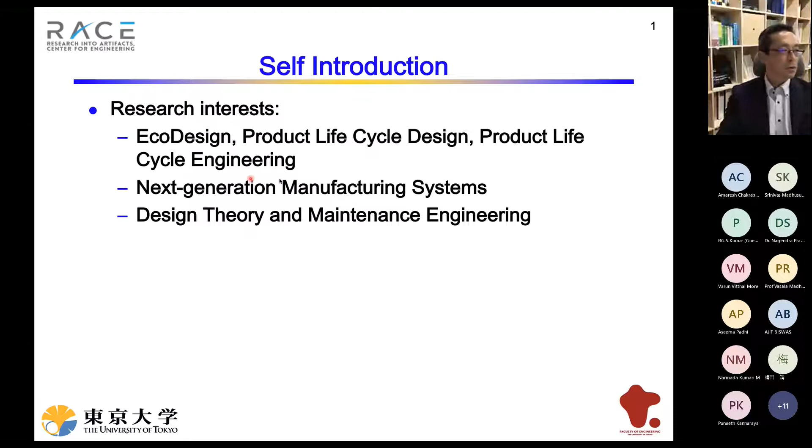Before going to the main topic, let me introduce the research center I belong to, which is called RACE, as Amaresh said, Research into Artifacts Center for Engineering. A little bit strange name, but this is the official name of our center.

And Professor? Yes? Apologies. Maybe you can switch off the video so that voice can be more clear. Okay, let me stop the video. Okay? How about it? Yeah, it's much better. The audio is much better. Oh, yeah. Thank you very much. Okay, and what did I say?

Oh, okay. As Amaresh said, the center has a collaboration relationship with Cambridge Engineering Design Center, and my center was reorganized in 2019, and the main focus is set to draw future visions of manufacturing and to develop system-oriented technologies for realizing the visions. The center consists of 3 divisions: Value Creation Division, Cognitive Mechanisms Division, and Applied Intelligence Division. I'm leading the Value Creation Division, and this presentation introduces you the overview of the research of this division.

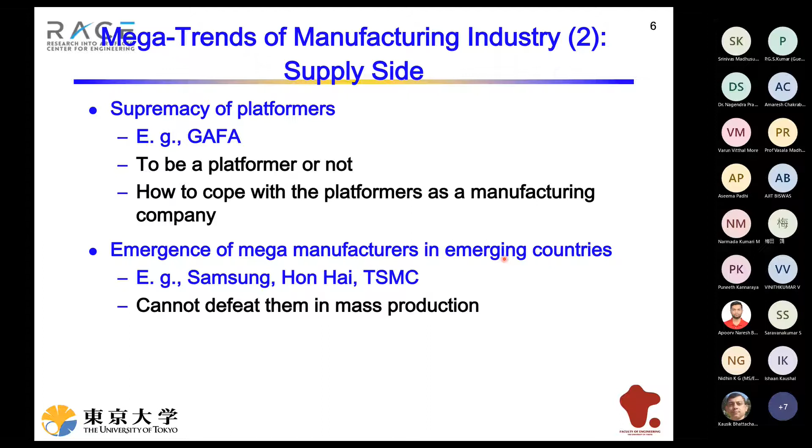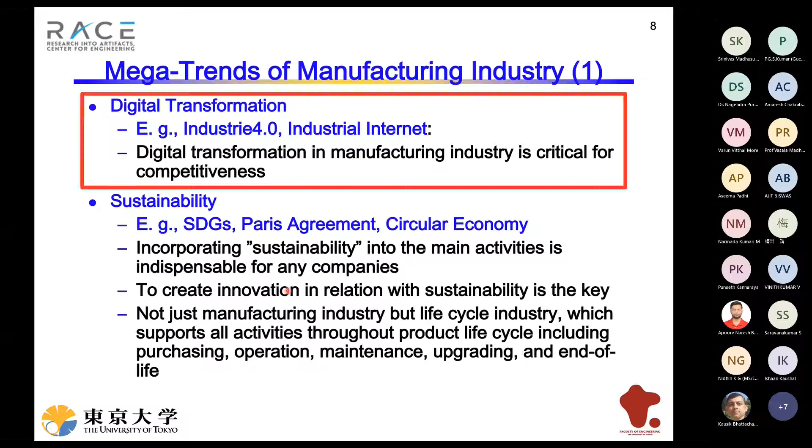And between these two areas, low altitude is emerging, where ICT and manufacturing are mixed, as exemplified by Industry 4.0. Siemens, IBM, GE are very strong in this world, but there might be some chance for Japanese manufacturers, perhaps also for Indian manufacturers, because you are very strong in software. Here is the focus of this lecture.

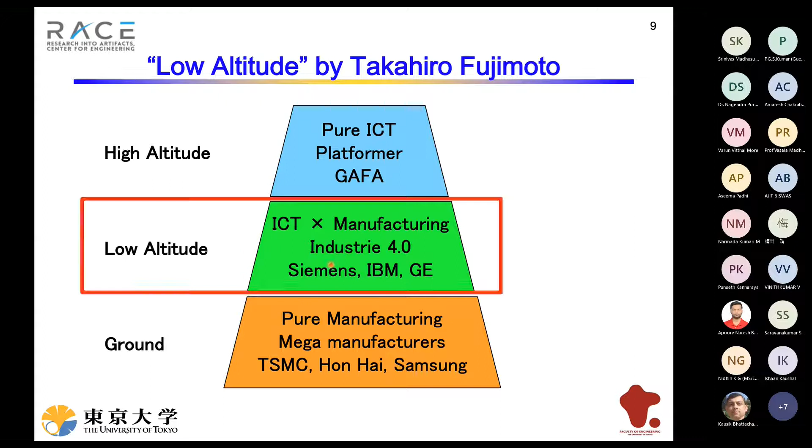This will improve productivity in a revolutionary way and enables massive mass customization. The original concept is sometimes criticized, that such automation may steal jobs of workers. But nowadays, the concept of Industry 4.0 is expanded to include human-centric and sustainability.

I think the essence is cyber-physical systems, which is a system where the cyber world and the physical world are deeply connected. Information is acquired from the physical world, processed by the cyber world, and the physical world is controlled by the cyber world.

So digital twin is also an important concept. Digital twin, my interpretation is, digital twin is a form of CPS, cyber-physical systems, and the model in the cyber world corresponds to the object in the physical world one by one.

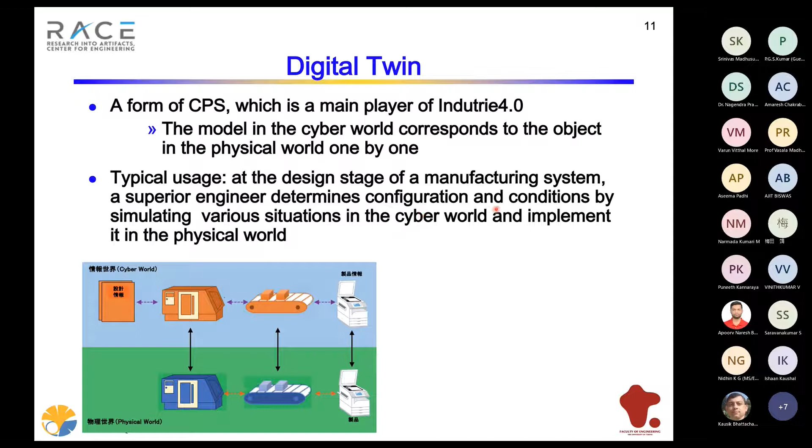So typical usage is at the design stage of a manufacturing system. A superior engineer determines conditions by simulating various situations in the cyber world, and if he or she finds out a best solution, he or she implements it in the physical world.

As I said, Siemens takes advantage in this domain. Let me show you a demonstration video by Siemens. I hope you have not seen it before.

Can you hear the sound? Yes, we can hear. Okay.

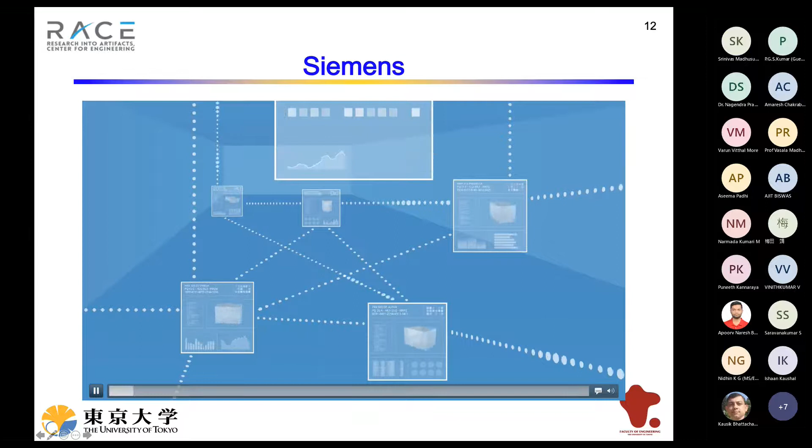They will be completely networked and control production autonomously, and in a way that is more efficient and uses fewer resources than ever before. The possibilities are so vast and groundbreaking that many experts refer to it as a fourth industrial revolution, Industry 4.0. The first steps towards Industry 4.0 have already become reality.

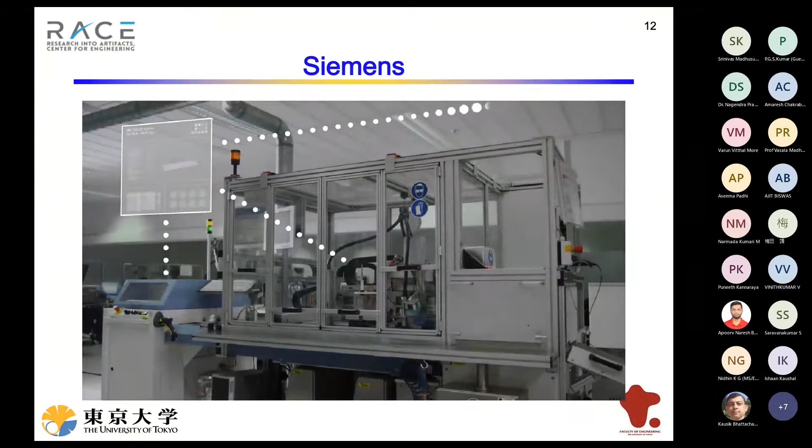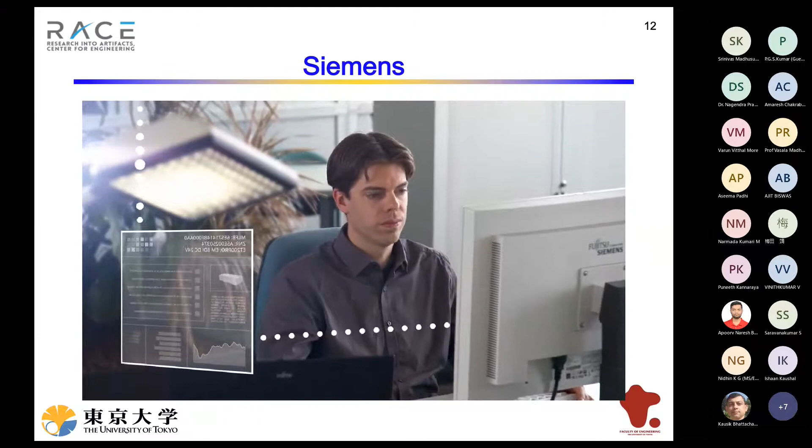It all starts when mass production components become a unique item, with their purpose predefined at the outset. Because even before manufacturing, the component exists in virtual reality, including all information required for its production. But all the other necessary components also have to be mapped into the virtual world. They also get names and addresses, and thus an identity, so that they know where and when they are needed in the production line or process.

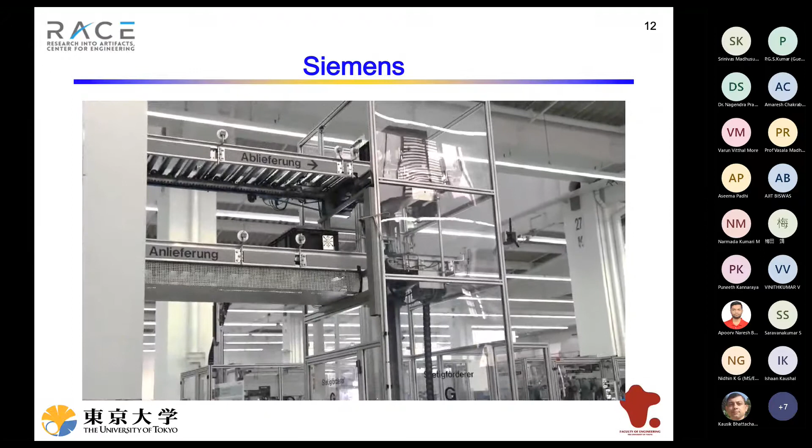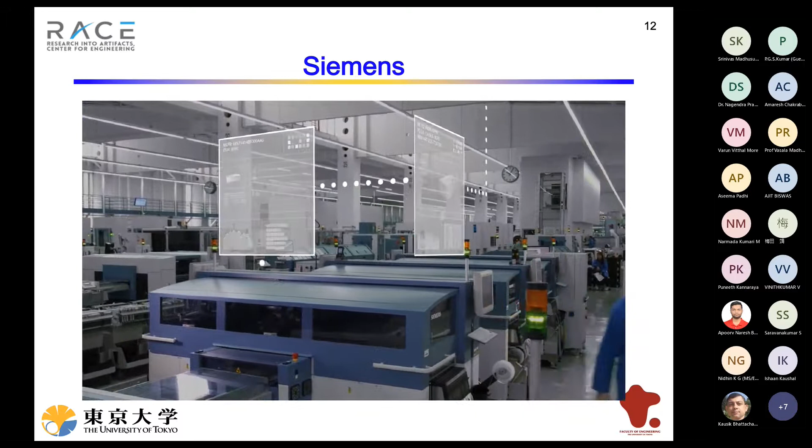Equipped in this way, they are able to negotiate their way through the digital factory for kilometers before reaching their destination. Arriving at the processing station, the workpiece is identified and the machine calls up in real time all information needed for processing. After each station, the work gets checked automatically, either optically or by using other measurements. Deviations from target specifications can thereby be discovered on the spot, and faults can be eliminated quickly.

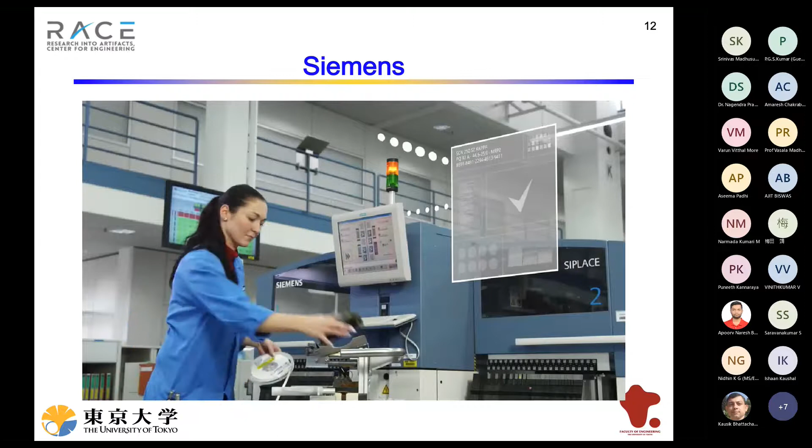If a machine needs replenishment or maintenance, it issues an appropriate request before shortages or breakdowns are experienced. The amount of resources used is immediately recorded in the system, and stocks get updated. During processing, all relevant data for the product is stored in its own digital product memory. This means that every stage of production can be traced precisely.

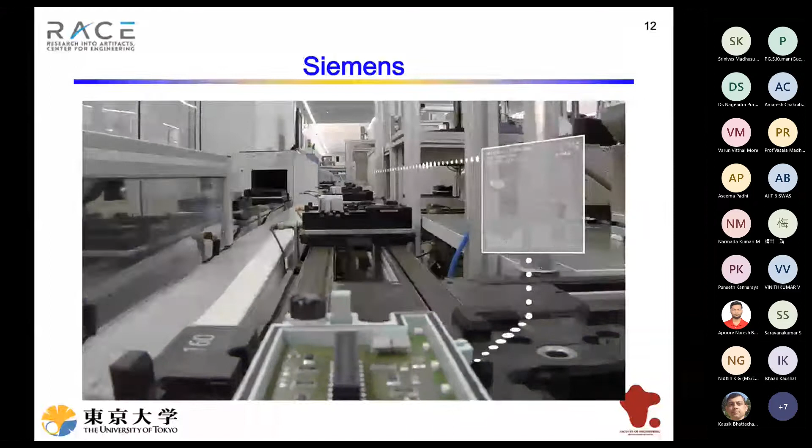In the factory of the future, machines and workpieces will even communicate directly with each other and make autonomous decisions about the next production step, comprising a system that is decentralized, efficient, and flexible. For this, so-called cyber-physical systems are the key enabling technology. But for all this technology, humans are still crucial. Even in a highly automated production environment, creativity, experience, and the ability to assess and evaluate situations remain irreplaceable.

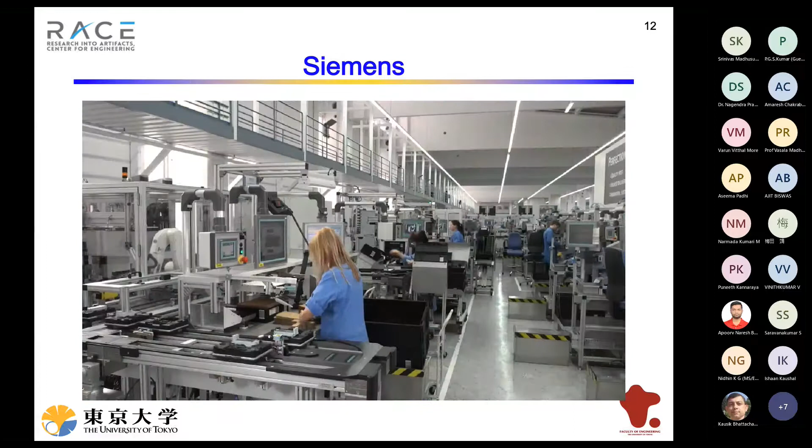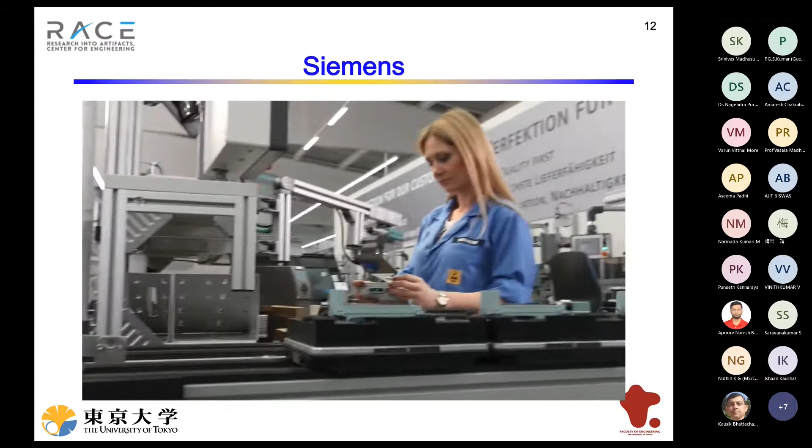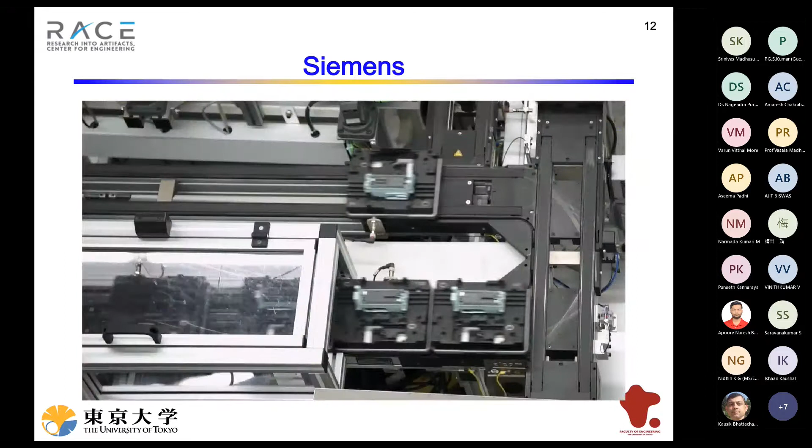But technology can provide valuable support. Operator-safe control systems already allow automatic and manual production to be combined. And regarding quality control, employees use augmented reality to determine whether the product meets the required quality standard and can be shipped to the customer. Electronics and software allow for ever higher levels of networking to be reached. Completely new, complex systems are being developed in next to no time. The German electronics industry is at the heart of this rapid change with its own innovative products.

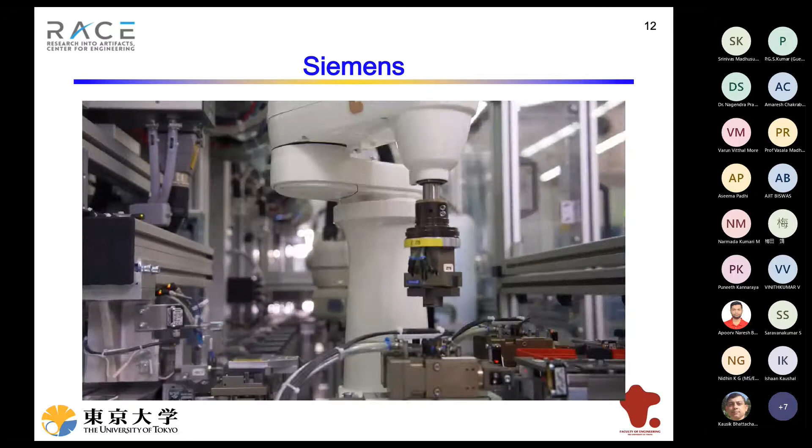Some important questions need to be resolved before factories become truly smart, including topics such as standardization and IT security. Yet the opportunities provided by Industry 4.0 are enormous. Productivity can be increased by up to 30%, and both the quality and diversity of products will significantly rise. At the same time, the period between development and production will shorten. Thus, Industry 4.0 will make a decisive contribution towards maintaining and improving Germany's competitiveness as an industrial location center.

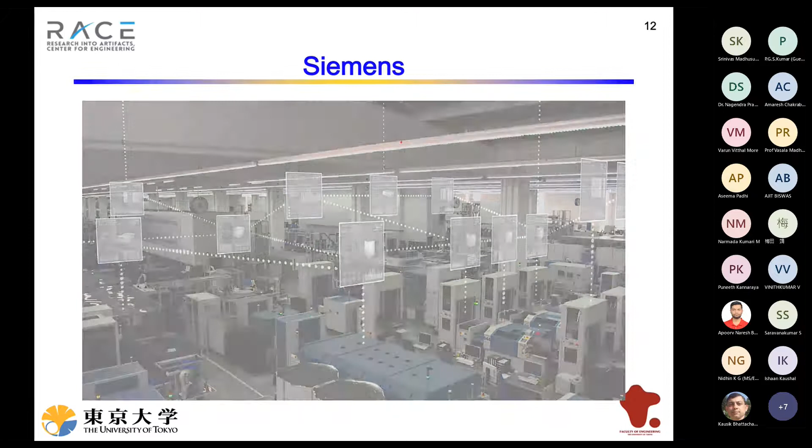Okay, this is a typical image. You may have known the image of an Industry 4.0 based factory.

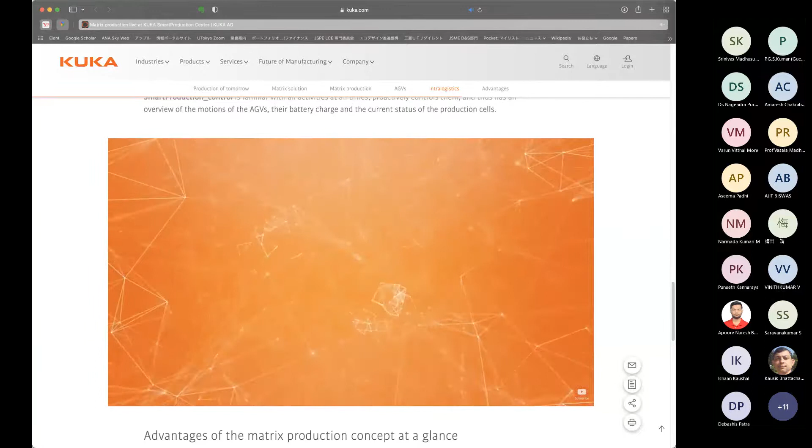Okay. Let me go back, sorry. Just a moment. I cannot go back. Go back. Yes, you're back. Can you see? What can you see? Just a moment. Sorry, it's very difficult to operate. Okay, I think I'm now fine.

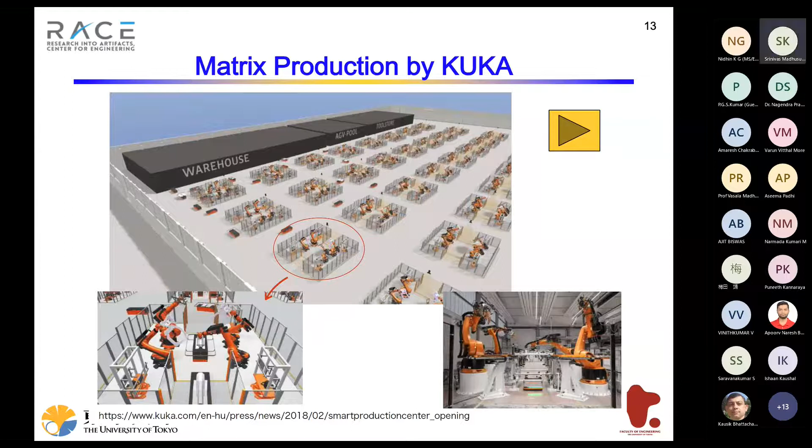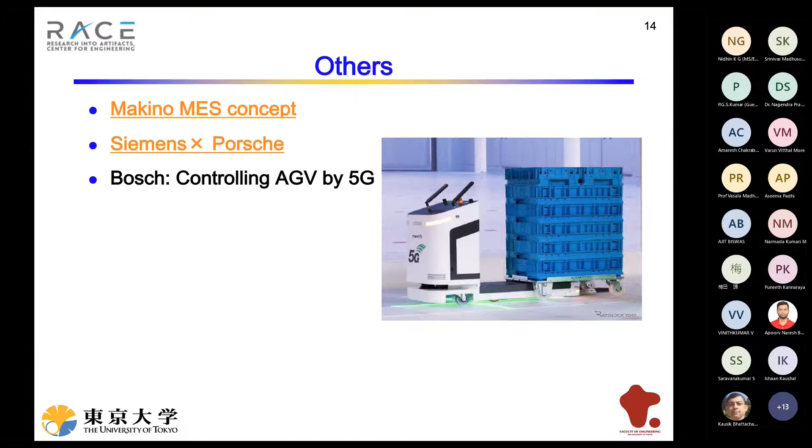Matrix production by KUKA. And there are several demonstration videos on the internet using a very cellular flexible manufacturing system of AGVs with 5G telecommunication. So, this is a very rough summary of megatrends.

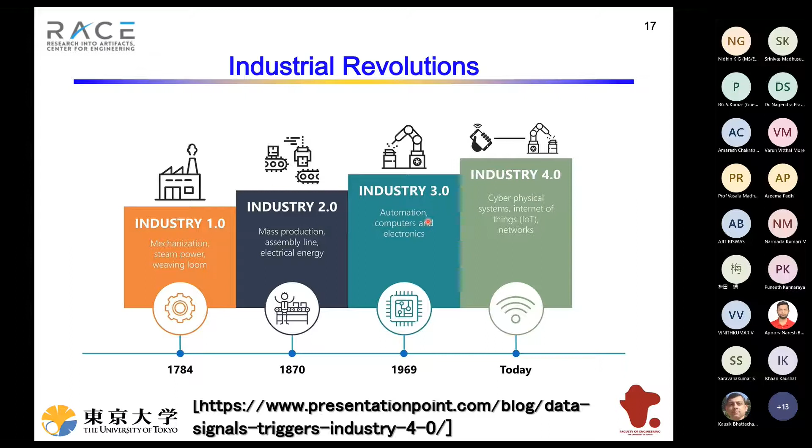You may have known the four steps of industrial revolutions. The first step is the steam engine. The second is mass production. The third is automation, including CAD, CNC, and industrial robots. And the fourth is now. Japan was strong in the era of Industry 3.0. So let me discuss features and issues of the Japanese manufacturing industry, mainly issues in the megatrends we discussed.

First, about digital transformation. The Japanese manufacturing industry failed to propose a new manufacturing paradigm from the 1980s until now, because Japanese manufacturers are advanced in Industry 3.0. In a factory, machines are automated and everything is digitalized, but not connected to the outside. Especially, each company automated in their own way without employing standards, platforms, or standardized tools like Siemens. And very thick barriers between companies hinder being connected.

Second, about sustainability, the attitude is very passive and just follows legislation. This is not adequate nowadays, and they have very weak motivation to create innovation in relation to sustainability. About the supremacy of platformers, I cannot imagine world platformers like GAFA coming out from Japan. Is being a parts supplier to the platformers a good position? I don't think this position is sustainable.

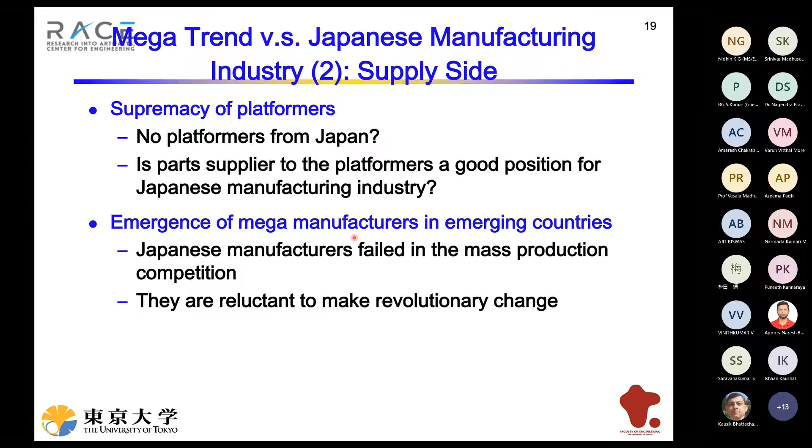Emergence of mega manufacturers in emerging countries: Japanese manufacturers were very strong in the 1980s and failed in the mass production competition around 2000. But still, they are reluctant to make revolutionary change. That's a problem. Change of people's sense of value: Japanese manufacturers persist in producing high-quality hardware and are not good at planning service business.

Finally, the Asian market. Let's assume that people in this market want cheap products with moderate quality. Japanese manufacturers are not good at making such products. When we visit Southeast Asia, it is often said that Japanese products are reliable but not attractive. This is the position of Japanese manufacturers in Asia.

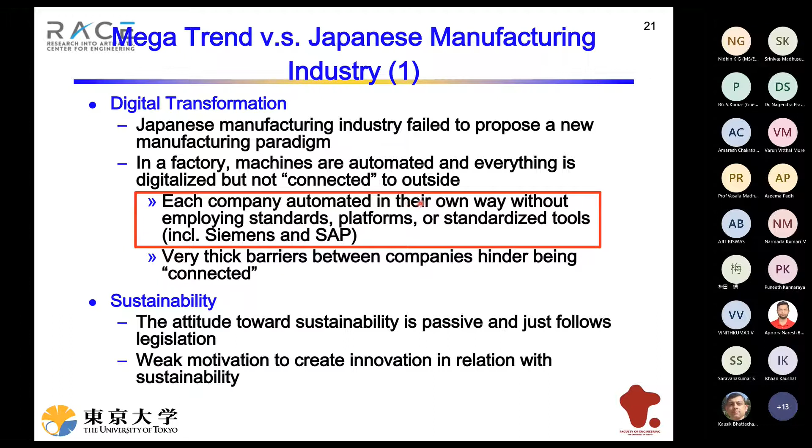So let's go back to the issue of digital transformation. A typical behavior of Japanese manufacturing is here: they go on in their own way, without employing standards. On the other hand, Germany considers standardization very important. For example, this figure indicates RAMI 4.0, the Reference Architecture Model Industry 4.0.

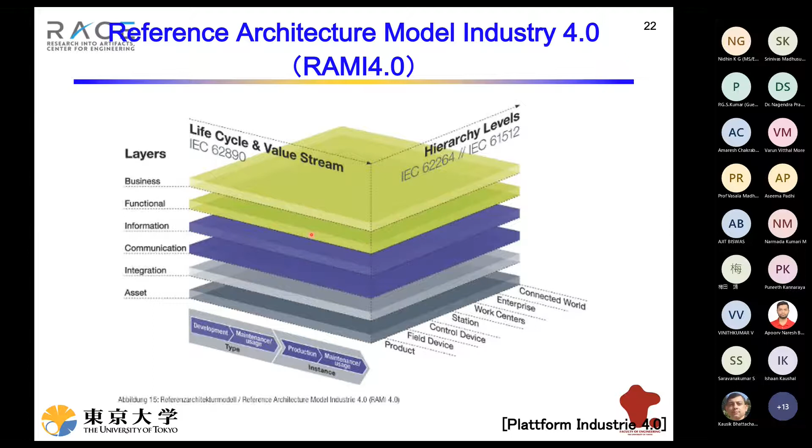Why is standardization so important? We can interpret that Industry 4.0 tries to transfer manufacturing systems from know-how based, which Japanese manufacturers are good at, to modular and standardized ones. Industry 4.0 aims at high-level automation for cost reduction in the first sense, but digital transformation and networking is for flexibility and mass customization.

In other words, the concept of the manufacturing system is based on digital, modular, and architecture, which requires top-down thinking. And I think this is almost the correct approach to next generation manufacturing systems. But Japanese manufacturers are not good at these three items. That's a problem.

My personal observation on the Japanese manufacturing industry is as follows. They have too large a legacy to act quickly and prefer the status quo to jumping into digital manufacturing. For example, they hesitate to invest in transforming to digitalized manufacturing and keep trying to make high quality hardware products because they cannot escape from the past successful experience in the 1980s, namely mass production of high quality products with low costs.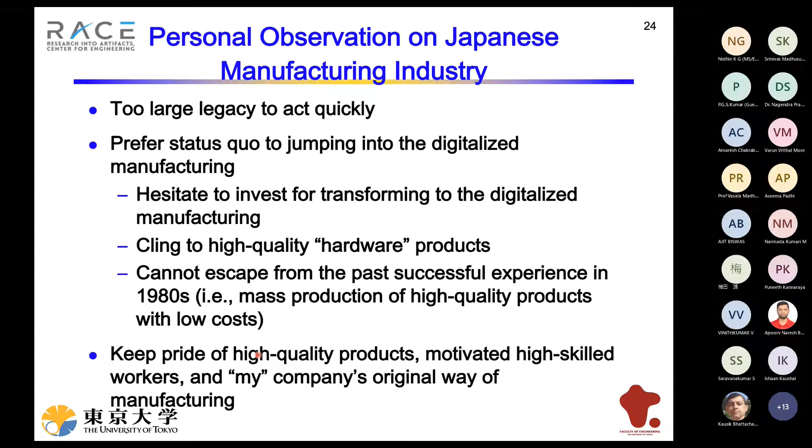Where was I? Okay. So on the other hand, they keep pride in producing high quality products, they have very highly motivated, highly skilled workers, and they have a very strong mind of their company's original way of manufacturing. So let me show you a typical example of digitalization in Japanese manufacturers very quickly.

A typical pattern of SME manufacturers is like this. They added IoT capability to machine tools since the government gives some subsidy, and they can collect a lot of log data from machine tools. But they do not know how to utilize the data for creating value. That's a problem. Machine tool manufacturers provide, for example, preventive maintenance service, but SMEs hesitate to provide their operation data to the manufacturers.

On the other hand, of course, some manufacturers try to win an advantage in this area, including FANUC FIELD system and Mitsubishi Electric Edgecross. They want to be platformers in digital manufacturing. But these two frameworks are just platforms of IoT connection, not supporting contents, so to speak.

Let me click. Sorry, it is very troublesome, but let me show. This is a FIELD system video, a very short one.

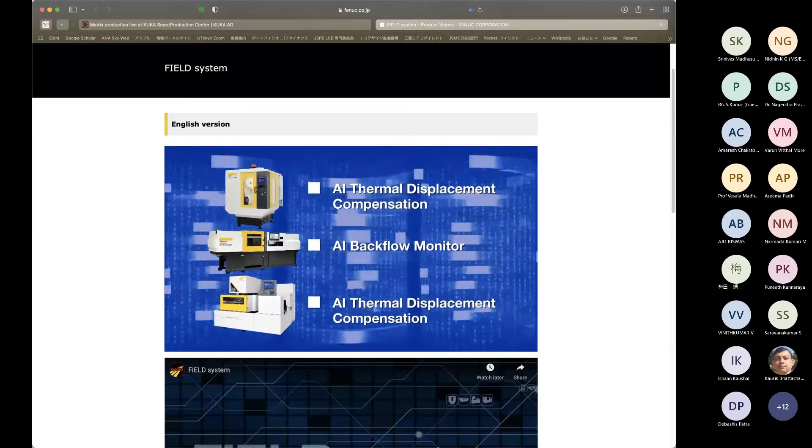FIELD system is an edge-heavy open platform which connects, monitors, thinks, and drives all machines and devices on the factory floor. It connects machines and devices at the edge, regardless of the manufacturer or generation. Through networks which work with LINKi or through a vast range of applications, it monitors and performs preventive maintenance. FANUC's AI uses FIELD system or the LINKi series to gather and analyze data suitable for artificial intelligence. The intelligent usage of machines leads to a smart factory which is highly efficient and optimized.

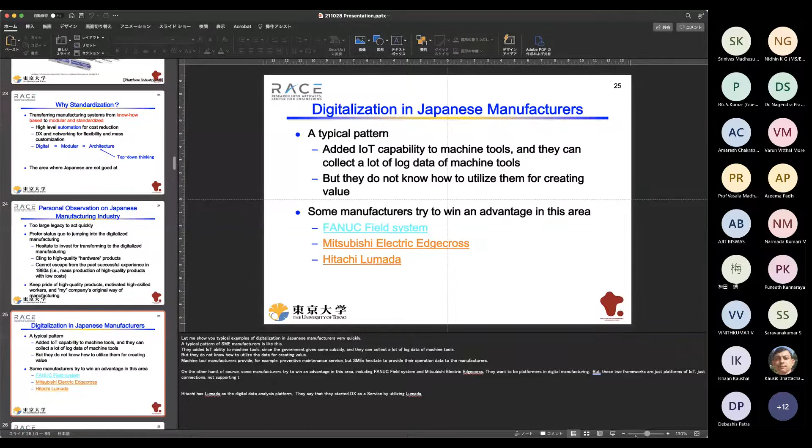Something like this. Let me see what happens. Sorry. Going back. This one. And what happens? Very

complicated procedure. Okay. And I hope you know the company name Hitachi. Hitachi has Lumada. It's a digital data analysis platform, and they say they started DX as a service, digital transformation as a service, as a new service by utilizing Lumada. Lumada is a very big data analytics platform. Okay.

So I can point out two problems from my standpoint. First, the Industry 4.0 type digital transformation in manufacturing might not fit the strengths of the Japanese manufacturing industry. The question is, what are the strengths of the Japanese manufacturing industry? I asked young manufacturing engineers, who are the hope of the future, in a famous Japanese manufacturer.

There are a bunch of answers, but some typical answers include: keep promises, even if they are verbal promises, not written, or collaboration among different sections. Well, this one is, I think, interesting: read what is not written in the drawings and complement their defects, assuming what is not written. Or even if the design is not good, the manufacturing section produces products by complementing it during the startup production stage. I don't know if this is a good thing or not.

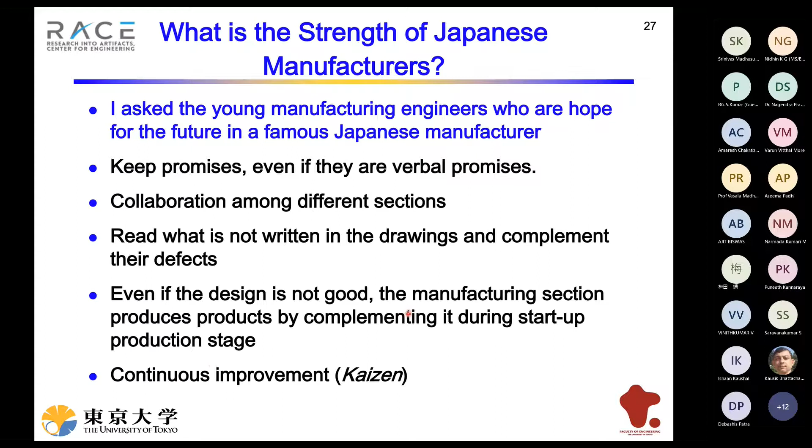And continuous improvement named Kaizen. So perhaps the strength is continuous pursuing of high quality in manufacturing, which results in high quality products and continuous improvement in production. This is the first problem.

And the second problem is many engineers and technicians cannot follow the digital transformation. However, in the digitalized manufacturing systems, they should execute engineering activities, including planning, design, development, construction, operation, maintenance, Kaizen, continuous improvement, and replacement of manufacturing systems by utilizing the cyber world in addition to the physical world. But they are not prepared.

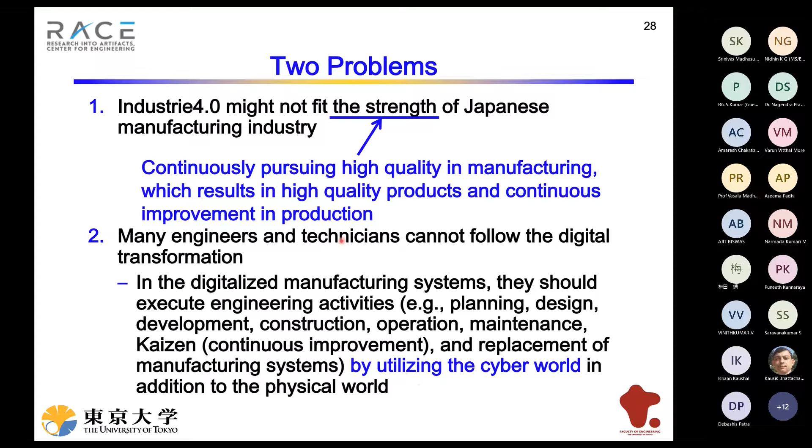Perhaps we need new manufacturing strategies after mass production of high quality products. So for the first topic, we should transplant the strengths of the Japanese manufacturing industry to the new vessel, I mean digital transformation. So very human-oriented.

And for issue 2, we need a new education curriculum for manufacturing system engineers. The current curriculum for manufacturing engineers in Japanese universities, for example in my university, is very old-fashioned. We need not only manufacturing science and technologies, but also IoT, CPS, and AI, and we need some system thinking.

In this presentation, I cannot touch upon the second issue because of limited time. The focus of this presentation is manufacturing system engineers, whose role model is as follows.

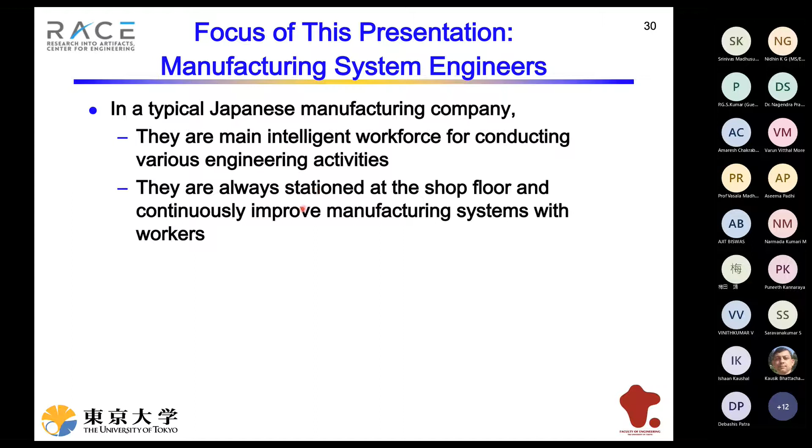In a typical Japanese manufacturing company, they are the main intelligent workforce for conducting various engineering activities, including design of manufacturing systems, or operation and maintenance of manufacturing systems. And they are always stationed at the shop floor and continuously improve the manufacturing systems with workers.

So next, let us move on to the third part, digital triplet.

Do you have any questions or comments on the second part? Is it fine for you? Yeah, I think so far so good. Looks fine. Okay, so let's move on.

So, digital triplet: we are proposing the concept of digital triplet as a form of cyber physical production system. We observe that Industry 4.0 takes a rather top-down approach, assuming CPPS, or cyber physical production system, does not change frequently since they have enough margins and robustness.

It aims at automation as much as possible, and perhaps it is not assumed that CPPS is modified by workers at the manufacturing site. But as we discussed in the previous slide, the strengths of Japanese manufacturers include field experts' diligence, knowledge, and skills, everyday Kaizen. As a result, the production lines are kept improved under the lean concept.

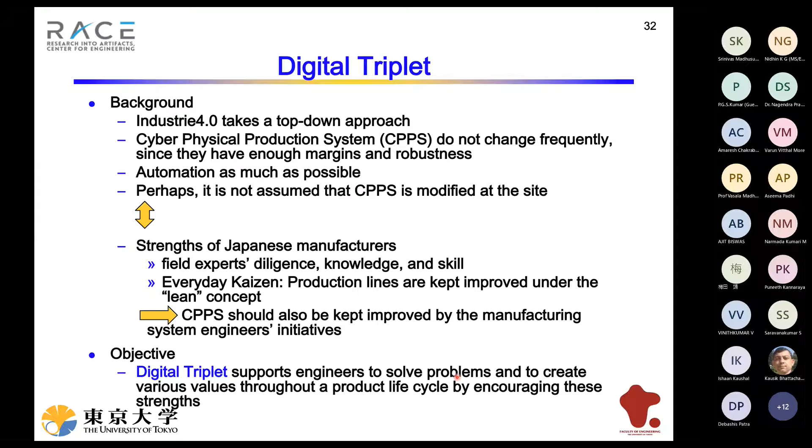Digital triplet integrates these three worlds to realize integrated support of engineering activities throughout the product life cycle, including design, manufacturing, use, maintenance, and so on, and circulation of resources, very important.

Let me illustrate an engineering activity on digital triplet. From now on, engineers should execute engineering activities mainly with the cyber world in addition to the physical world. In such a case, an engineer executes...

an engineering activity, and the activity consists of data collection, information analysis using AI tools, some simulators or CAEs, other tools, and evaluate the result and make a decision. And if needed, execute a plan. We call this cycle the engineering cycle. When an engineer executes this cycle, the cycle creates some value from the data.

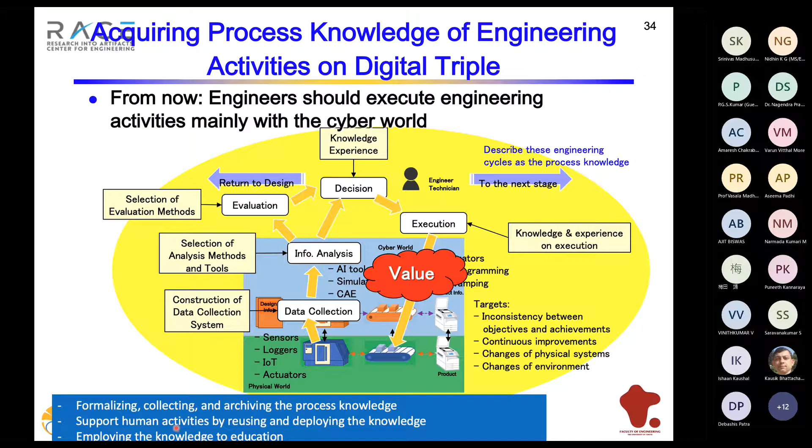We'd like to describe these engineering cycles as process knowledge. In other words, we'd like to formalize, or collect and archive, the process knowledge, support human activities by reusing and deploying the process knowledge, and employ the knowledge for education by generalizing the knowledge. That's what we want to do. In other words, the engineering support we assume is as shown here.

We'd like to represent an engineering cycle as a combination of digital twin and process knowledge on digital triplet. This is possible by recording engineering cycles in the cyber world, including collecting data, which data they collect, which data they focus on, and which tools they used in analyzing data. So the history is represented as a log in the cyber world. This is the basic fundamental concept of digital triplet.

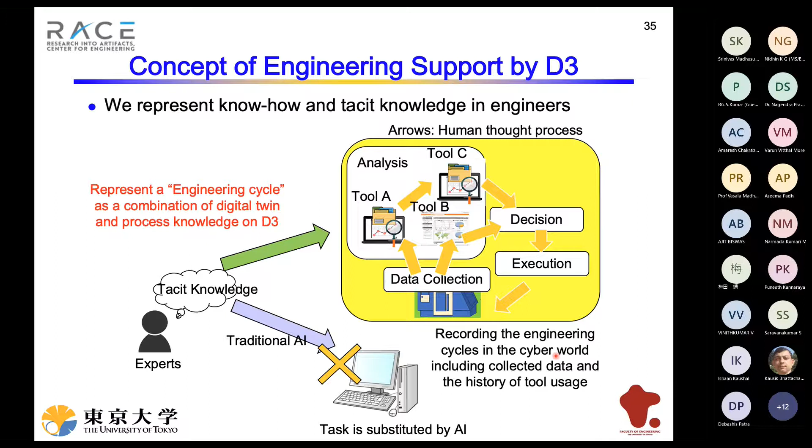Let me describe the image of digital triplet with an example. This is the example of machining molds for injection molding of plastics. This is a real example, and this company is famous for making high-quality molds. They machine the molds by machining centers, and various know-how are needed in generating NC programs to operate the machining center and selecting cutting conditions and tools.

First, on the digital triplet system, we recorded how skilled workers determine the NC program and cutting conditions. We developed a digital twin system of the machining center, and a team of skilled workers makes NC programs and machines a mold with the NC program and certain cutting conditions, and they evaluate the quality of the machined mold and modify NC programs and cutting conditions. They repeat this cycle until they get the mold with enough quality.

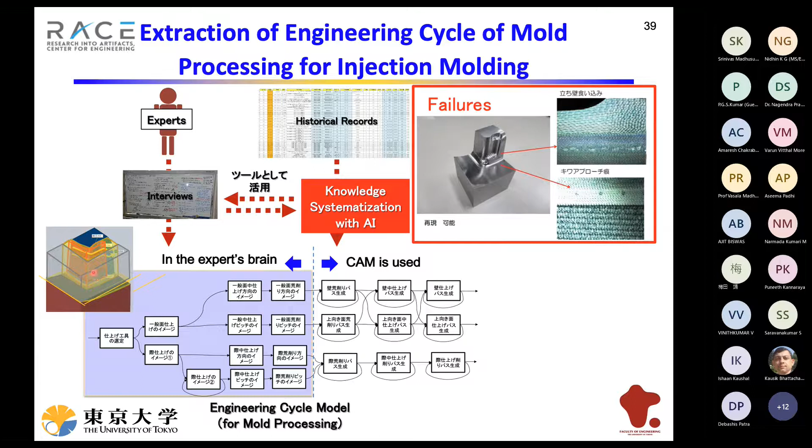This illustrates a part of process description in the problem-solving layer for selection of a finishing tool. First, the expert estimates required length and R, the radius of the tool. If the radius is larger than 0.1 millimeter, they try to select a tool from standard tools the company prepares beforehand. Here, the guiding principle is shorter length and larger R is preferable.

If the expert cannot find the tool, they search for special tools which are not used regularly in the company. The guideline here is also that shorter length and larger radius is preferable, and deformation should be smaller than 15 micrometers. If they find the tool, this action of selecting the finishing tool is terminated. If they cannot find the tool, they should use EDM, electric discharge machine, instead of normal machining.

Anyway, the top expert in this company recognized that this engineering cycle model is useful. In this way, we extracted an engineering cycle as a process description.

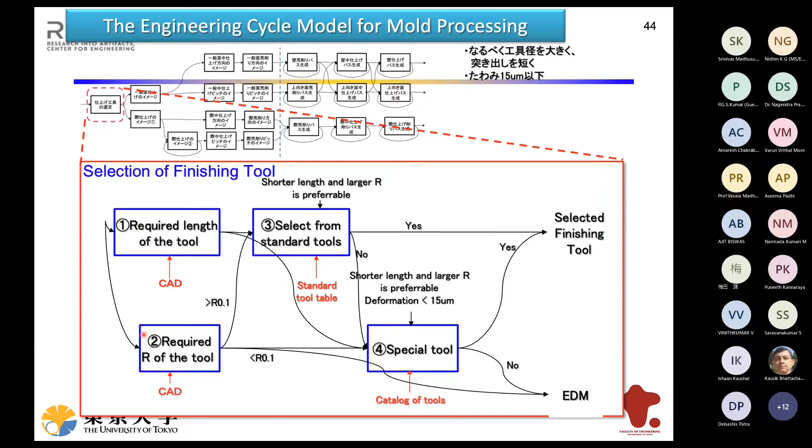In this way, the engineering cycle model becomes smarter, digitalized.

This is the result with the engineering cycle model. The cutting direction is correct, appropriate tools are selected, and there are smaller loads on the tools by dividing the processes. It has 9 steps. The order of processing is not good around here, but this can be modified. So by using the engineering cycle model, the novice understands the flow of the processes and the way of thinking to select the conditions of each process.

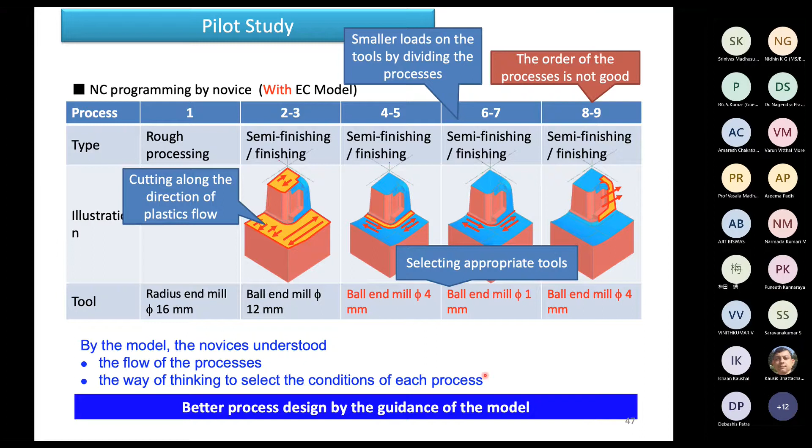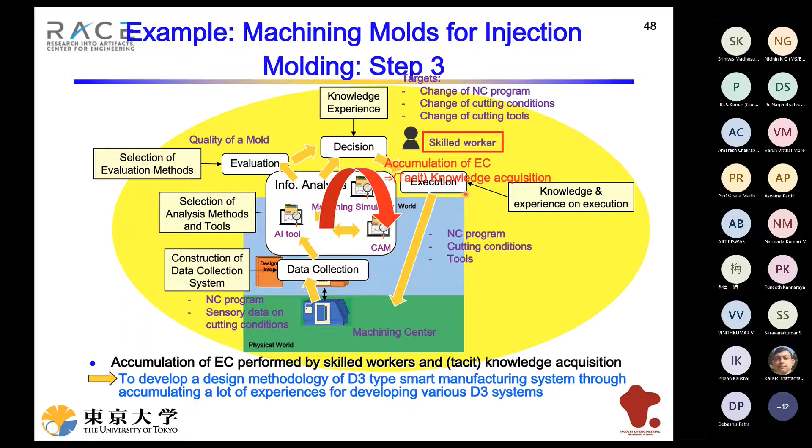This is our achievement. What we'd like to do with digital triplet: by accumulating engineering cycles on the digital triplet system, we hope we can extract tacit knowledge, and by using such extracted knowledge, skilled workers can try to develop new skills. By repeating these cycles and repeating development of various digital triplet systems, we as researchers can arrive at some design methodologies of digital triplet smart manufacturing systems. This is our goal.

Okay, if you don't have any questions, let's move on to the final part. Okay, sorry, I skipped this slide.

There are some research efforts on human-centered cyber-physical systems. Digital triplet is a combination of human engineers and cyber-physical production systems. Digital triplet does not aim to automate manufacturing, but rather to support human engineers. We dare to decompose the cyberspace of CPPS into two worlds: digital twin, which models the physical world, and the intelligent activity world, where humans solve various problems by using the digital twin.

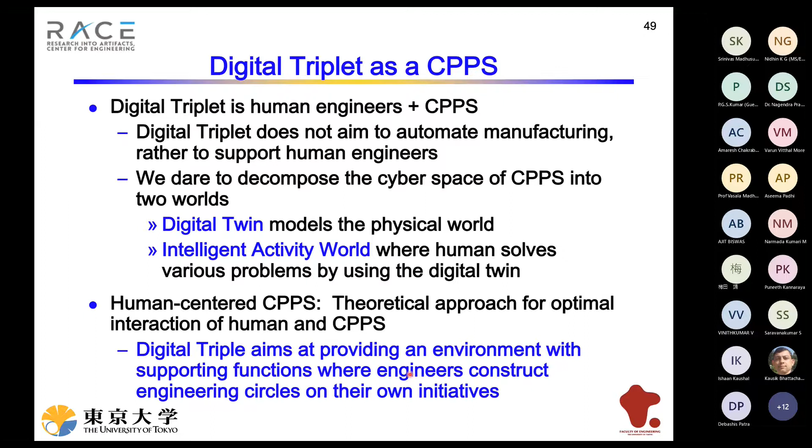There are some research efforts on human-centered CPPS. In these efforts, I dare to say that human mainly means the workers, but the target of digital triplet is intelligent engineers. Digital triplet aims at providing an environment with supporting functions where engineers construct engineering cycles on their own initiative. This is the new, digital type of continuous improvement, so to speak.

Okay, do you have any questions or comments? Okay, fine. So then let's move on to the final part, learning factories.

You may have already known this, but this is the concept of learning factory. It's a trend, I think, especially in Germany, to construct factories in universities for the purpose of education and research. If we have a factory in a university, it is very easy to teach manufacturing systems.

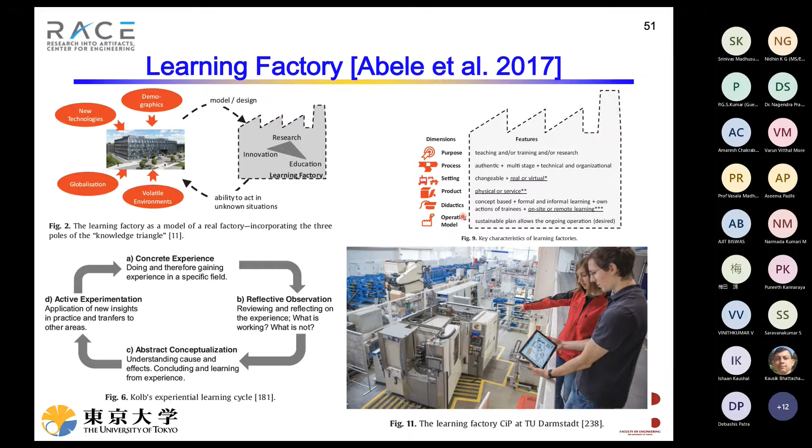Active experimentation and concrete experience reflect observation and abstract conceptualization, so we can run this kind of cycle on manufacturing systems. According to the concept of learning factory, we have constructed a much smaller factory than this very big one. It's at the TU Darmstadt.

This is the overview of our learning factory named Digital Triplet Type Learning Factory at Race, or D3LF at Race.

The learning factory we developed is used for education and research from the viewpoint of manufacturing systems. Rather than machine tool or processing, it covers related engineering activities, including design, operation, maintenance, or continuous improvement of manufacturing systems, including lectures and practice for undergraduates and graduates.

For education, we believe digital triplet, especially recording engineering processes, is very effective because it can record the processes of executing tasks by students. By watching the model, students can review what they did and how they did it. By comparing their record with expert processes, they can learn a lot about where it is good and where it is not good. We also do research, for example, developing a method to support engineers in executing continuous improvement by using digital twin. Utilizing digital twin, and of course digital triplet, is the key.

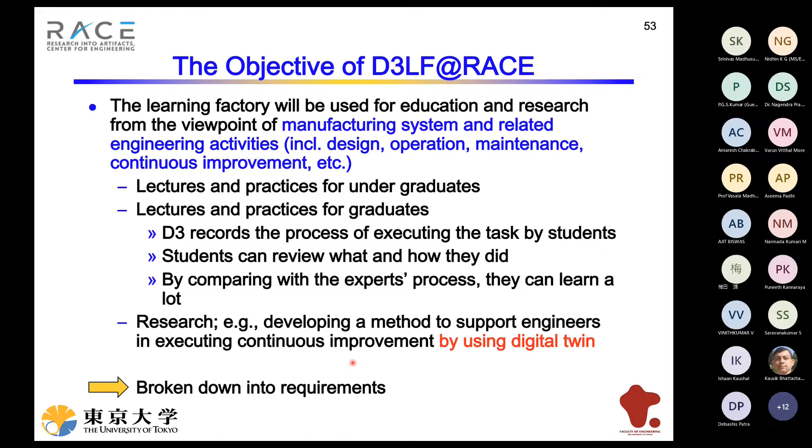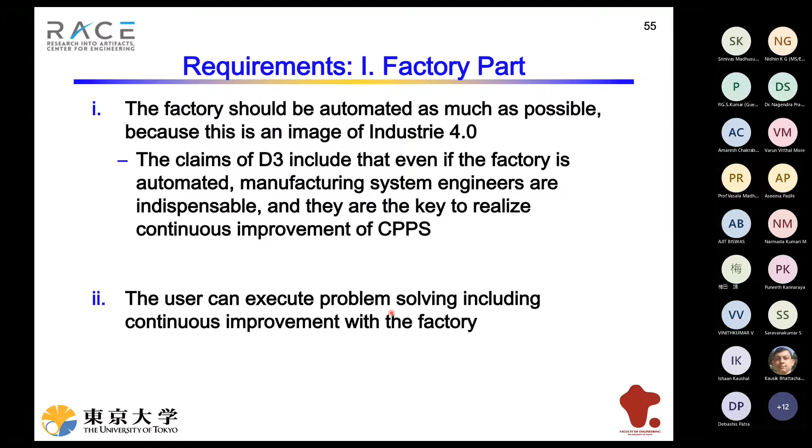The factory should be automated as much as possible because we think this is an image of Industrie 4.0. The claim of digital triplet includes that even if the factory is automated, manufacturing system engineers are indispensable, and they are the key to realize continuous improvement of CPPS. The second specification is that the user can execute problem solving, including continuous improvement with the factory. For realizing the first requirement, we constructed an automated assembly line of Lego cars as shown here.

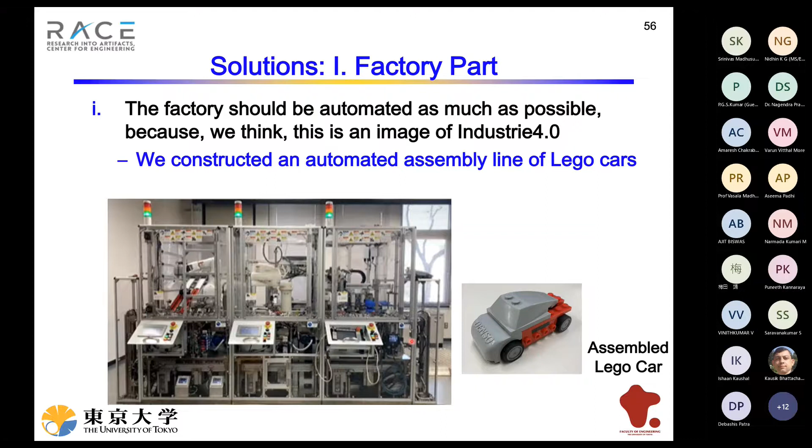I will show you the video. The video shows the assembly process of Lego cars, but the speed of the video is 2 times faster than the real one. Let me see. Okay. Oh, sorry. This has no sound. It's okay.

First, the tire is put, and second, the body is assembled with the robot. On the third stage, the roof is assembled and the quality is checked with the slope behind the robot. You can see, yes, this is the slope, and it confirms the car is running, and if the product is normal, the robot puts the car in this box. This is a very rough process.

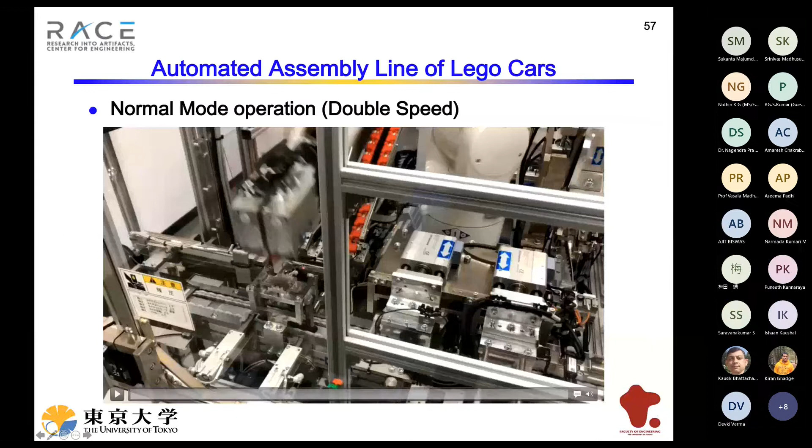Oh, I made a mistake. Sorry. How can I do that? Okay. Sorry. Just a moment. Please be patient. Let's do it again. Okay, I'll come back. Sorry.

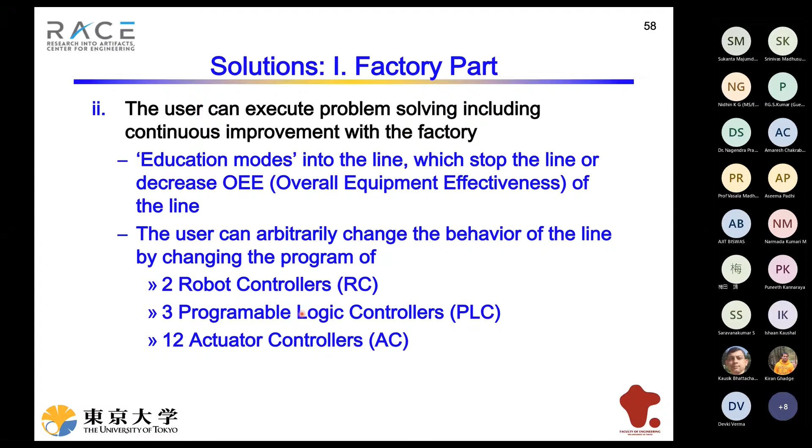And for the second requirement, we installed education mode into the line, which stops the line or decreases the OEE of the line. Also, we designed the line so that the user can arbitrarily change the behavior of the line by changing the programs of controllers installed in the line. Actually, the line has 2 robot controllers, 3 programmable logic controllers or PLC, and 12 actuator controllers.

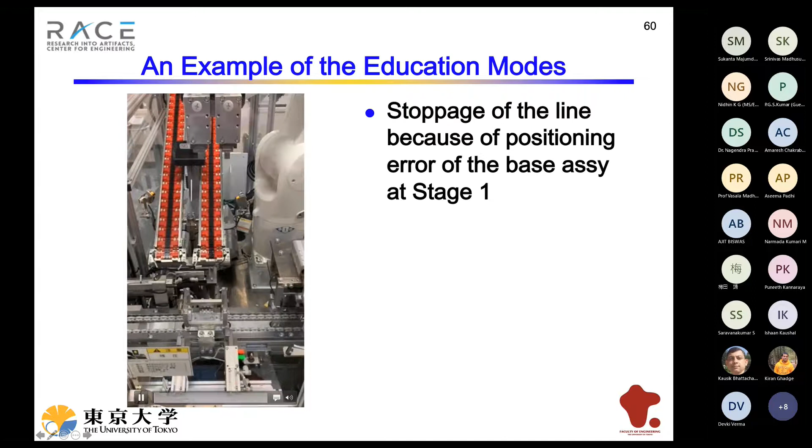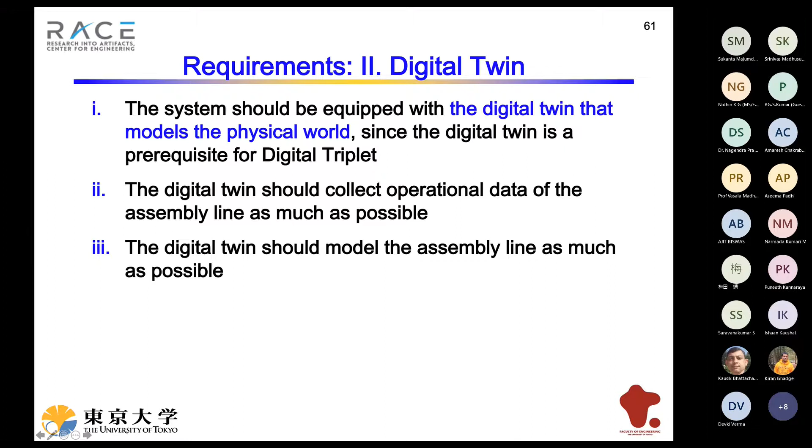So let's move on to the second part, digital twin. The requirement for the digital twin: the system should be equipped with the digital twin that models the physical world, since the digital twin is a prerequisite for digital triplet. The digital twin should collect operational data of the assembly line as much as possible, and should model the assembly line as much as possible. As shown here, we constructed the digital twin with 2 main functions. First, we developed a log database for realizing this requirement. And we employ a 3D model-based simulation for visualizing the behavior of the line for the third requirement. We designed the digital twin to be expandable by adding various software.

This movie shows our online 3D simulation system. Here, this 3D model moves in a synchronized manner by receiving the signal from the real controllers in the physical world. The simulator receives the real data in the physical world and moves in a synchronized manner. Honestly speaking, it is very hard to make such online simulation, and this is still under development.

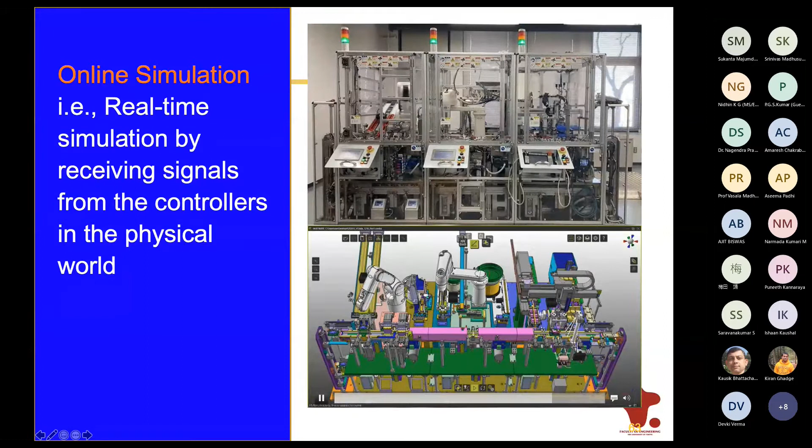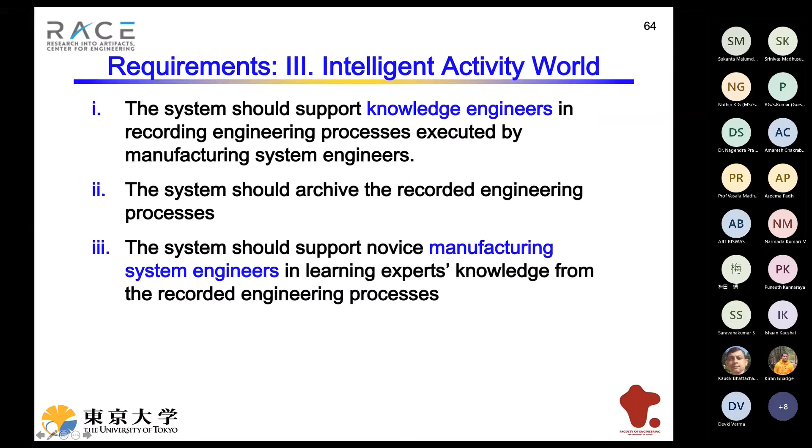In terms of the requirements for digital triplet, first, the system... Oh, sorry, time is running out. The system should support knowledge engineers in recording engineering processes executed by manufacturing system engineers. Anyway, we developed an engineering process description subsystem using the PD3 language, and it consists of a PD3 description editor for supporting describing engineering cycles, a rule checker for verifying the correctness of grammar of the description, and reference setting tools that link actions in the intelligent activity world to the operation in the physical and cyber worlds.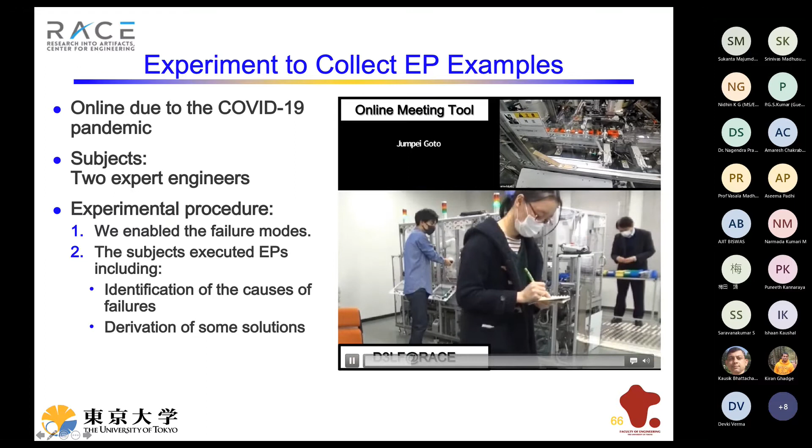And we executed some experiments with experts using this learning factory to collect examples of engineering processes like this. Sorry, it is in Japanese, but the expert is on the other side of the online system, and they asked to check the condition of the machine.

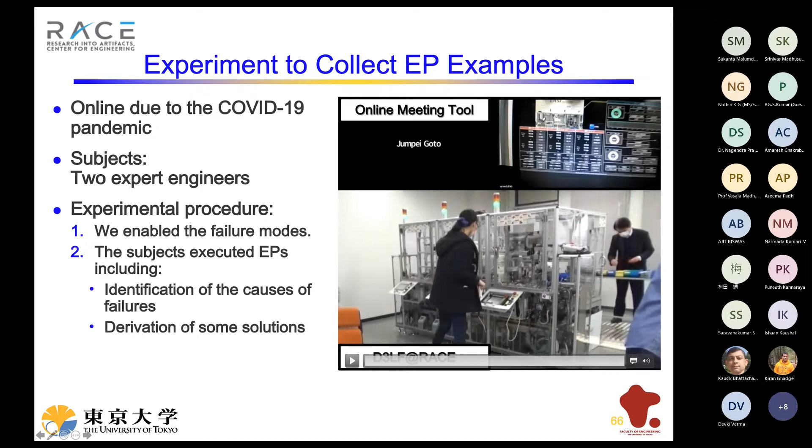So we recorded how they find out activated failure modes, and how they find out some solutions against them. And we recorded the process like this. It's very complicated, but it consists of the intelligent activity world, physical world and cyber world. So we succeeded in describing the engineering cycles executed by the expert engineers in the experiment using the system. We will try to reuse such descriptions by using the model.

So let me summarize quickly and discuss some points. There were a lot of research efforts on formalizing tacit knowledge, representing expert tacit knowledge on computers historically. But I think they were not successful. I believe one of the causes is the so-called symbol grounding problem. In other words, we can model knowledge, process, and know-how in a computer mainly by text and symbols, but the true meaning of those texts and symbols cannot be represented in a computer.

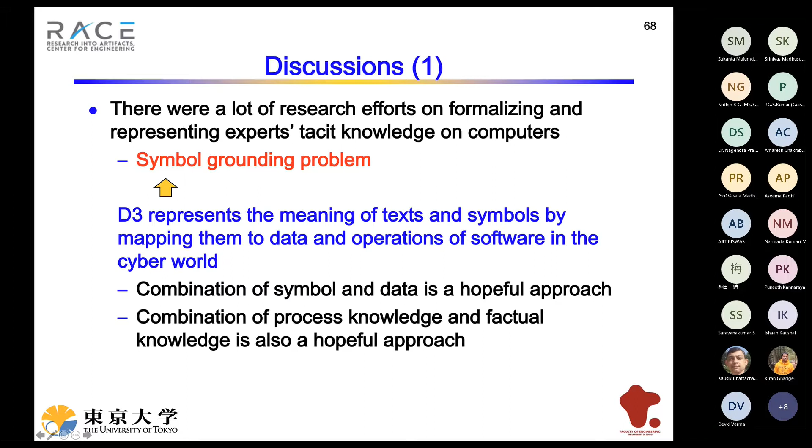Digital triplet represents the meaning of text and symbols by mapping them to the data operations in software in the cyber world. We believe that the combination of symbols and data is a hopeful approach, and the combination of process knowledge and factual knowledge is also a hopeful approach. We derived some observations from this experiment and some exercises by the students.

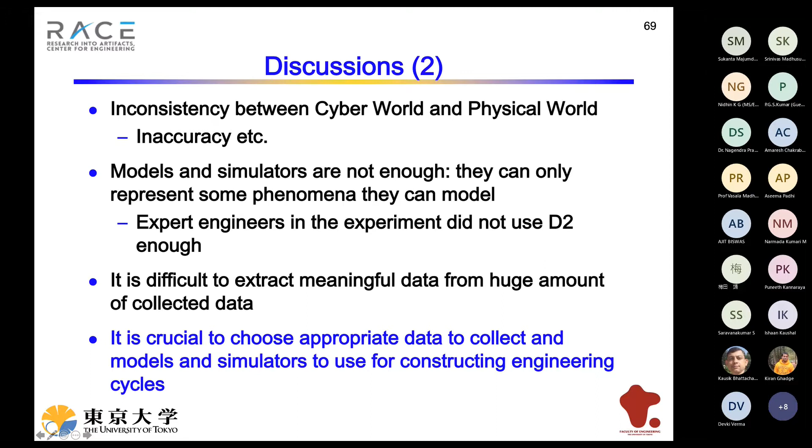Inconsistency between the cyber world and physical world is very critical, especially inaccuracy. And models and simulators are not enough. They can only represent some phenomena they can model. Actually, honestly speaking, expert engineers in the experiment did not use the digital twin enough. It is difficult to extract meaningful data from a huge amount of collected raw data. So it is critical to choose appropriate data to collect and models and simulators to use for constructing engineering cycles.

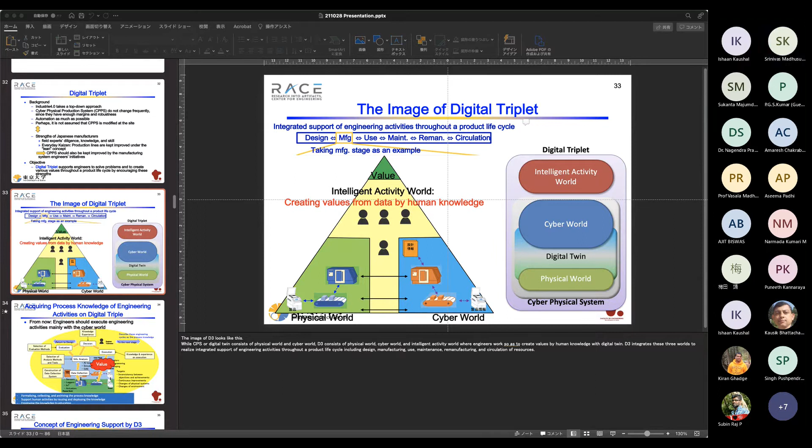And the intelligent activity world is a field or environment where human engineers work by using the digital twin, the objects in the physical world, and various software in the cyber world, including knowledge. So humans use the knowledge base in the intelligent activity world. This is my idea of the intelligent activity world.

Okay. Thank you. And just a comment: bringing the domain expert into the loop seems like a good idea, because in AI people are also talking about moving from model-centric AI to data-centric AI, where domain expertise can really help in labeling data, and that can help increase the accuracy of machine learning algorithms. So it seems like a really good idea. Oh, thank you very much. Yes, I agree with that. That's a trend.

And are PD3 and D3 similar to the Business Process Model and Notation language? Yeah, the language itself is very similar, but where is the correct slide? We'd like to add a lot of links from the symbols to the operation data or operations of software. So this is something like RPA, robotic process automation.